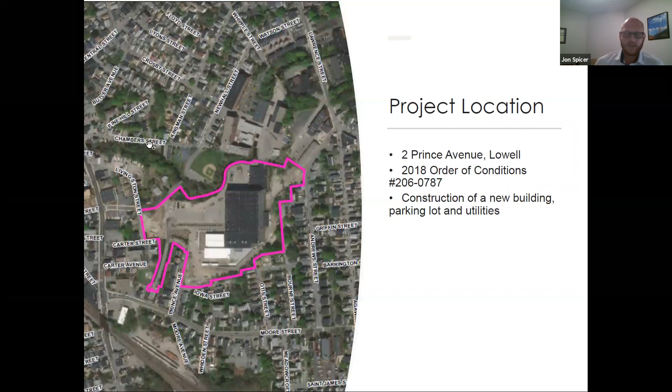We're going to use a similar process to 2015, constructing an 8x8 wooden barge, more like a wooden platform, so the 2-man crew can keep supplies and capture any debris, removing it from the brook safely.

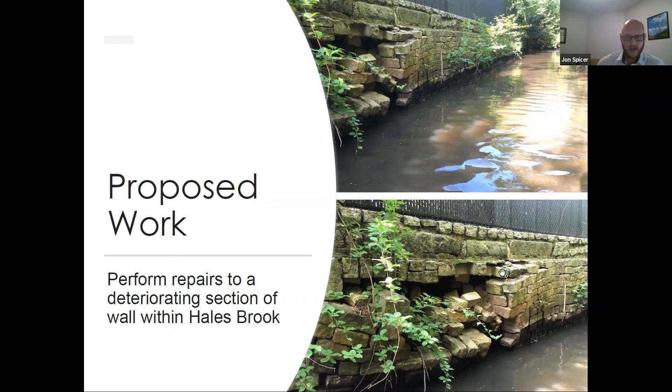They'll stabilize the poor condition wall with stones so it's not falling apart while reaffixing the blocks, which they should be able to reuse most of, bringing in new ones where needed. That'll be done with Portland cement and sand. Any debris will go in 5-gallon buckets, taken to the active construction site which has full perimeter erosion controls, dumpsters, and places to dispose of material.

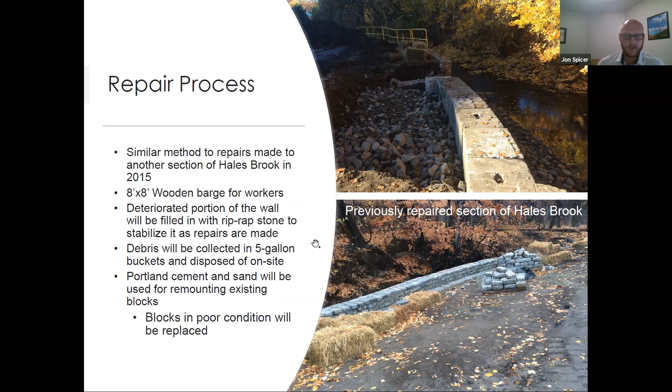For context, on the property there's a gate - not a big gate, more like a pedestrian gate - so the 2-man crew can carry that wooden platform down into the river, which is pretty low and slow right now, and float it upstream about 200 feet to where the wall is damaged.

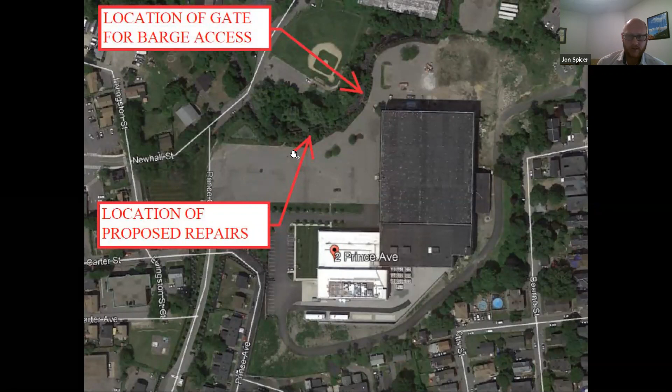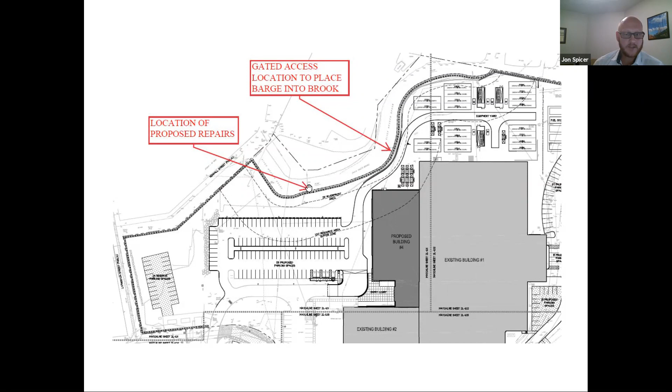This is the same thing as that aerial photo, but shown on the approved site plan from our 2018 order of conditions, with the location where they'll access and do repairs. That's pretty much it, the quick summary. I'll stop sharing and try to answer any questions.

Do you expect a lot of debris that will need to be taken away? You said 5-gallon buckets - that sounds like a small amount.

Yeah, I think from what the pictures are showing, they'll be able to reuse most of the blocks or remount them from what's there. It would be smaller stuff that they remove, and I wouldn't expect a lot from it. It's something they can take care of in hopefully a week or two, so it should be a pretty quick repair job.

Okay, when you said it was an active construction site, did you mean you were going to put this material in dumpsters? If it's trash, it'll go in dumpsters. If it's just gravel or concrete rubble, then there may be somewhere else they can use it on site.

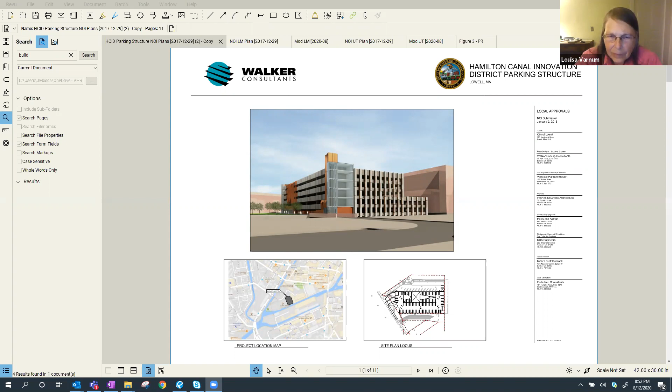Can you see what I'm presenting now? Okay, so this is just, again, to reorient. This is the Hamilton Canal District.

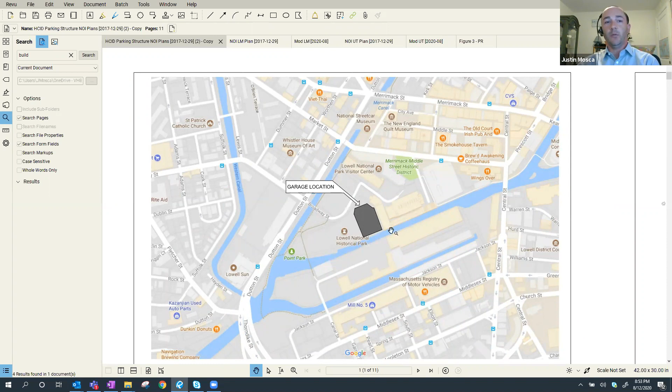The walls in that area, as you know, are extremely old. And this particular one in the tail race area is a little haphazard the way the wall is constructed. It's not as nice as some of the other canals, the formal canal walls.

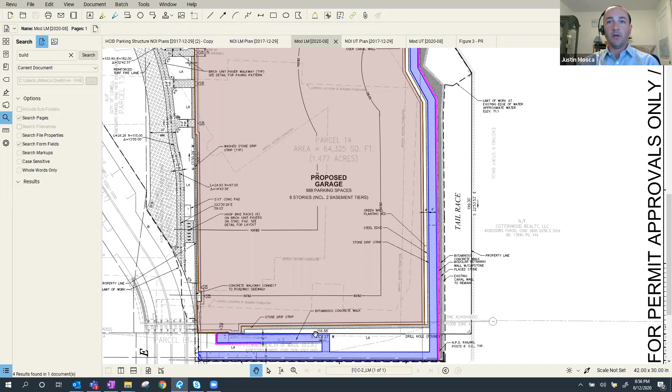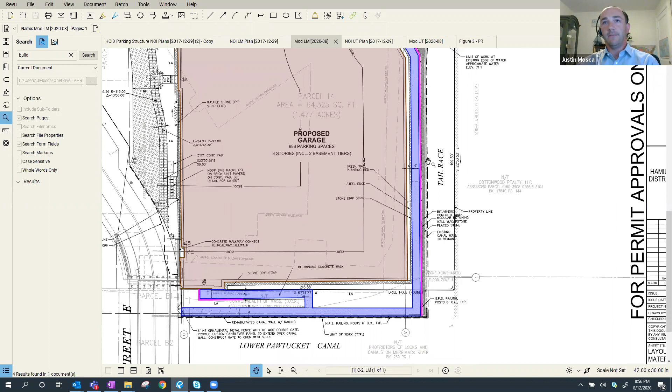Similarly, the magenta line you see is extending further down now — that wall on top of the wall — because we're connecting to this area and regrading along that entire east face. It's not significant; I probably should have broken this up into two. The retaining wall still comes down to approximately the same length, maybe a little further, and then it becomes a flush condition after that.

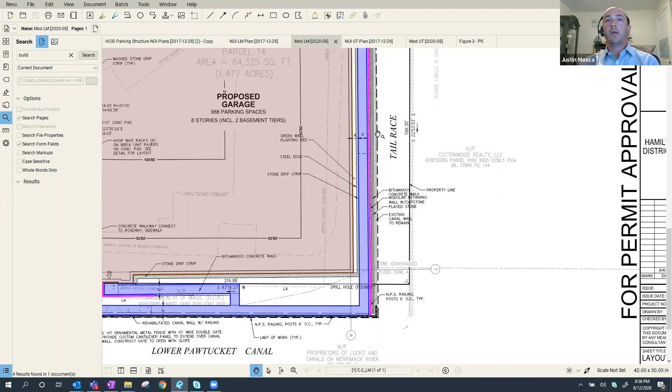Again, we're keeping the grade up so it's a level walkway. So it's above the tail race wall, but the walkway will actually be flush to the top of the wall, as opposed to the actual retainage happening further up.

The wall will also include — both walls will include — the National Parks Service standard railing that's been going in along the canal walks in other areas of town, in the city.

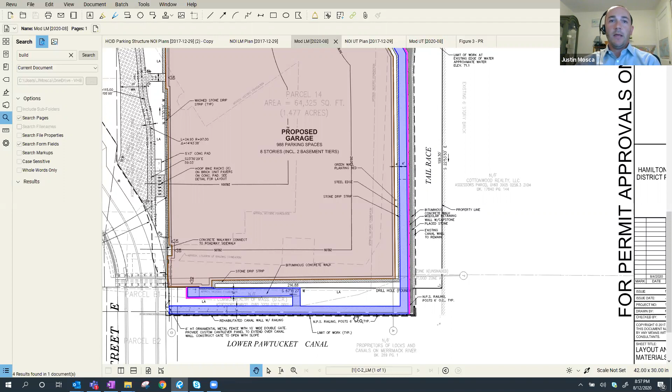And then I think the other big piece of this layout is that for this grading to work and for the canal walk to work, we'll be putting a cap on the canal wall along the Lower Pawtucket Canal.

As I mentioned, that one's a better wall, so it's not something we're nervous about modifying or extending up. It'll be coming up about 18 inches with some granite block and cap on it, and the National Parks railing will be installed on top of that. It's a modular block wall as you come along the east face, so we don't have to touch this existing tail race wall.

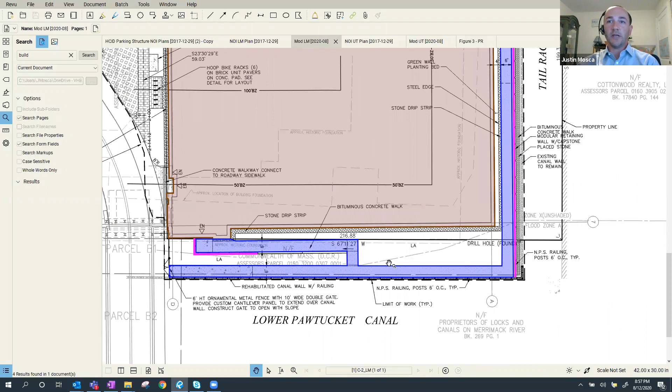And then when we get down to Lower Pawtucket, we'll be building up the existing canal wall with granite.

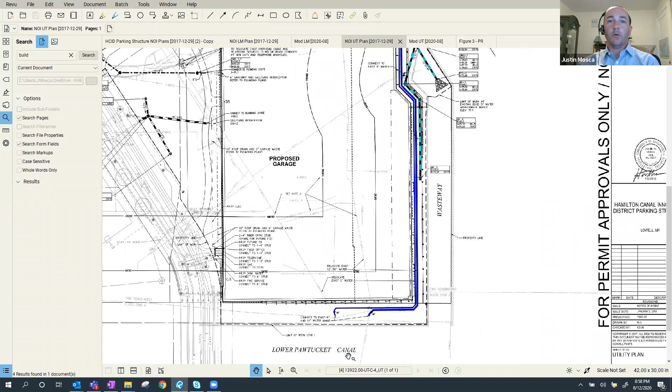Looking at utilities — if it switches over here — this was what was previously approved. There were two water line modifications, an 8-inch and a 12-inch water line, crossing Lower Pawtucket Canal, and we had to reroute those to get them around the building as we went through the site. We did some investigations after we got the order of conditions and found out those actually aren't active, so that work is coming out of this proposal — we no longer need to do that water line work.

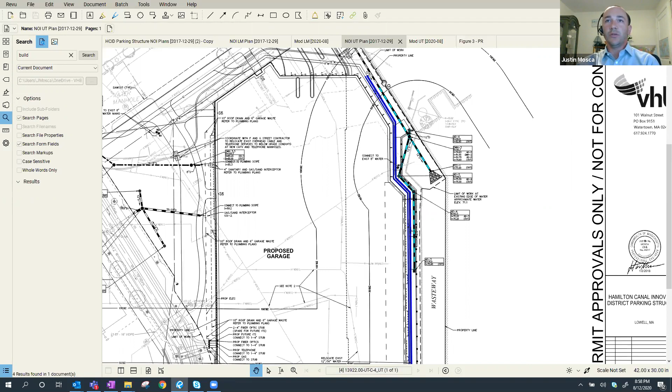The drainage is staying fairly similar. We had shown some area drains for this grading along the east side, but now where we're extending that walkway — I'll flip over to the proposed.

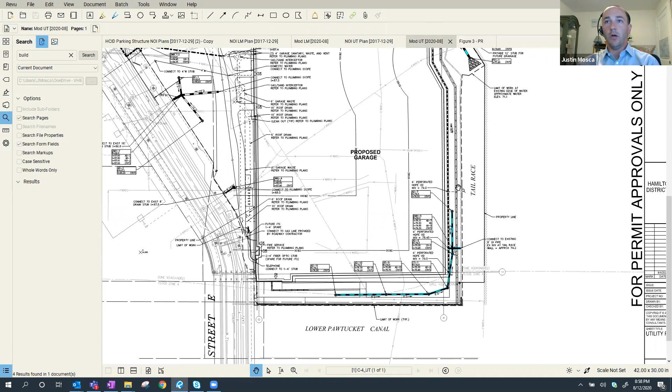The way the grading's working out, it actually makes sense for us to pick this up further down because we're grading down along the canal on the east side. And then everything remains fairly flat along the south and the east.

So what we're proposing to do there is throw in some area drains off the walkways. There's actually an existing pipe penetration through the tail race wall that we'd like to use because we don't want to touch that wall if we can help it. It's old, it's not the best construction. So having an existing pipe available to us to connect that drainage into is what we see as the way to go to get that drainage into the canal.

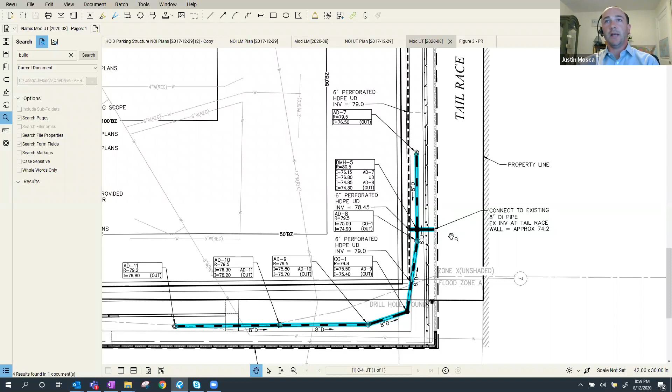It's similar to what you'll see in other places in the canal district, where you're collecting on the surface, and those pipes basically act as scuppers, collecting on the surface, bringing it below, and then discharging it into the canal. The last thing I wanted to discuss was just general impervious area, because you'll notice between those two layouts that we are adding some walkway area on the south side.

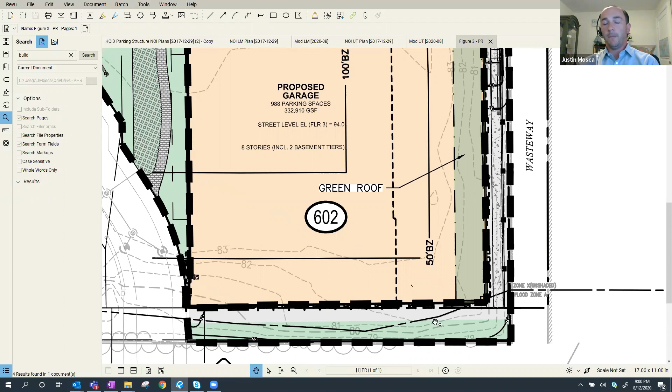When we did the hydrologic analysis initially, although it wasn't proposed on the layout materials plan that was approved, the hydrologic analysis actually did incorporate some impervious area back along the canal because we knew it was a possibility in the future that we'd be putting this canal walk in. We also assumed that everything along the east face would be impervious as well, which is not actually the case. There is pervious out there.

So all in all, it's fairly balanced compared to what was previously approved versus what we're proposing to do now. So there really shouldn't be any hydrology impacts associated with what we're trying to do.

There will be some lighting adjustments, probably some wall packs along the south, and then some bollard lighting along the east so that it's not impacting the Canal Place 3 condos. Those will be installed in that modular wall.

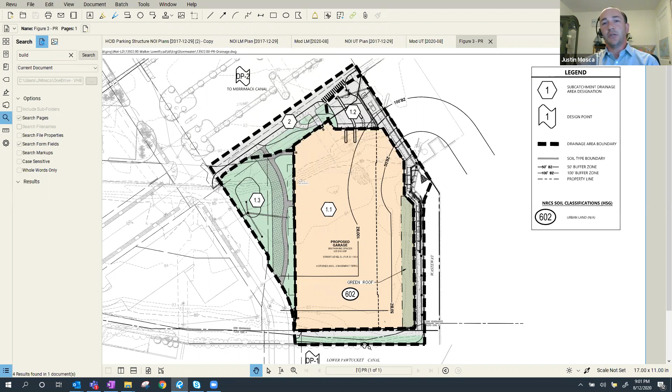I'm just looking through my list real quick. Yeah, I think that covers everything we're looking for. So really, the minor modification we're requesting is essentially some minor changes to what was proposed along the east, and then the addition of that walkway. I should jump over here so you can see the addition of this walkway along the south. All the landscape areas will continue to be loam and seed for the time being.

So I think with that, we can open up to any questions you have. I'm happy to answer any questions, I know I kind of ran through that quick. Okay, thank you.

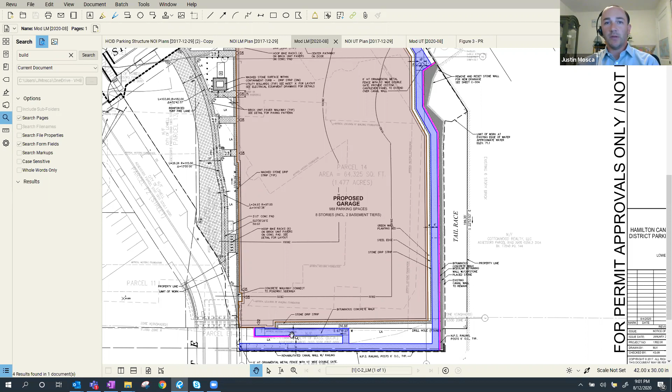So this walkway, is this something you expect to be active, or is it just kind of waiting for some connections to go somewhere? No, the intent is for it to be active. That's actually why we're doing this additional connection into the garage, so that it's not a dead end. There will be gates at either end that can be closed off, but the walkway connection will come all the way out to the street.

So what this will do is allow you to, it grades down along the east, and then when you come down along the south end, you can actually get up into the garage where there's an elevator. So as long as the garage is open, these fences will be unlocked and this can be an active area. What we don't want to do is create a dead end where people could hide out and not be accessible.

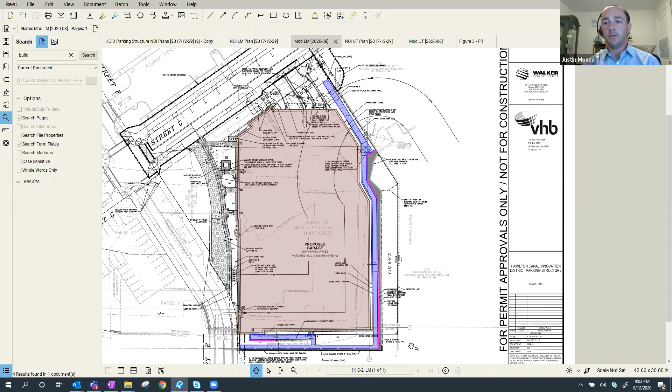Every canal is different, every canal walk is different. We'd have to see whether the problem with trash cans along the canals is just access for emptying them regularly. NPS does some, but the National Park Service would not be doing this. I don't know whether we could work it into the garage contract or not. A lot of the garbage that ends up on the canals actually isn't from canal users - it's swept in by wind or other things from the streets into the canals and floats down. So that's a problem, though.

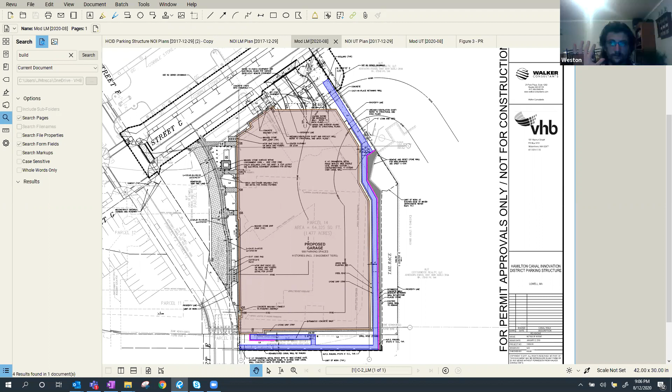Chairwoman Varnum, yes. Commissioner Lovely, yes. Commissioner Dillon, yes. Commissioner Butenheis, yes. Commissioner Downs, yes. Commissioner Standish, yes. Okay, motion passes unanimously, and that modification will be added to the current order of conditions.

Thank you, everyone, for your patience tonight. It's a long meeting, and thank you for coming in and explaining your project to us. No, thank you for hearing us, we appreciate it. Thanks, guys. Have a good night. Thank you. Appreciate it.

Okay, we do have some minutes from our last meeting, July 8th. We have a motion on the minutes. I'll make one small comment beforehand on the minutes.

Fran, I don't know if you can see them, I don't have them on hand right now. I can send you - I'll approve them, but I think there's a comment listed as Mr. Delania, but I think I was the one that made the comment. It's on page 9, it says it looks like they are tripling the amount of pavement, but they are improving the infiltration with enhanced structures. The next comment from Mr. Delania said, that is correct, they felt they want to ensure an almost zero impact for the expansion of the parking area. I think that was a response to my comment.

Got it, but that's at the top of page 9, and it's just that it's me that made that comment. Okay, but everything else looks consistent with my little cheat sheet notes. We rely on you, Bill. Don't do that, but it takes a village, guys. So we can make those changes, but if everything else looks good...